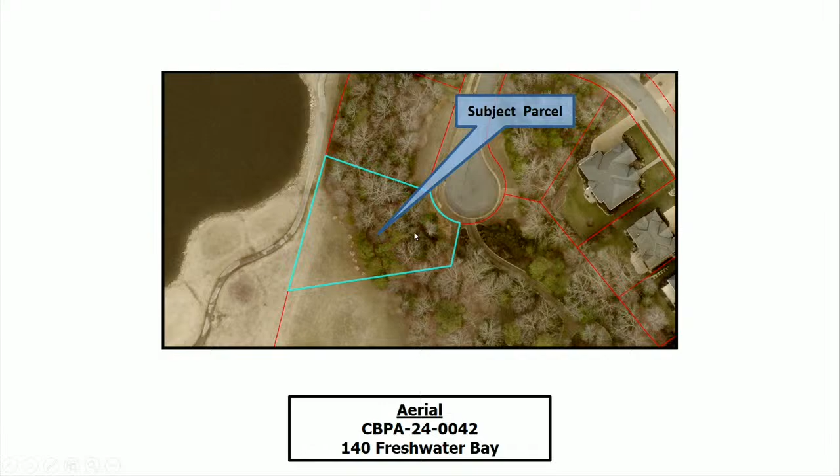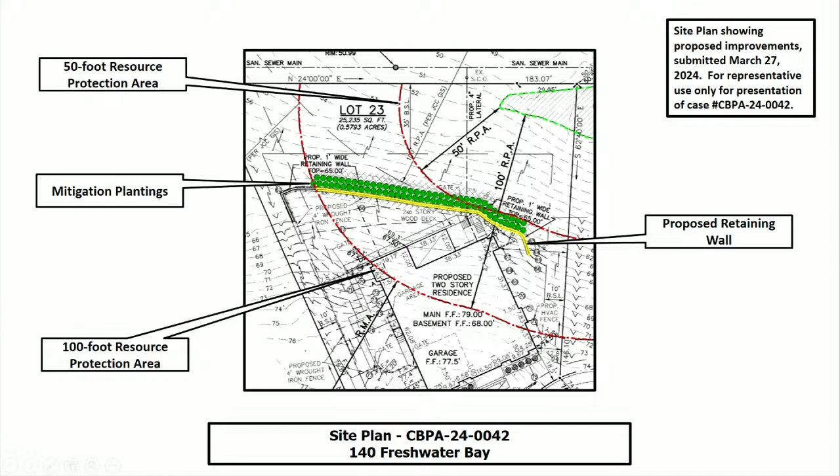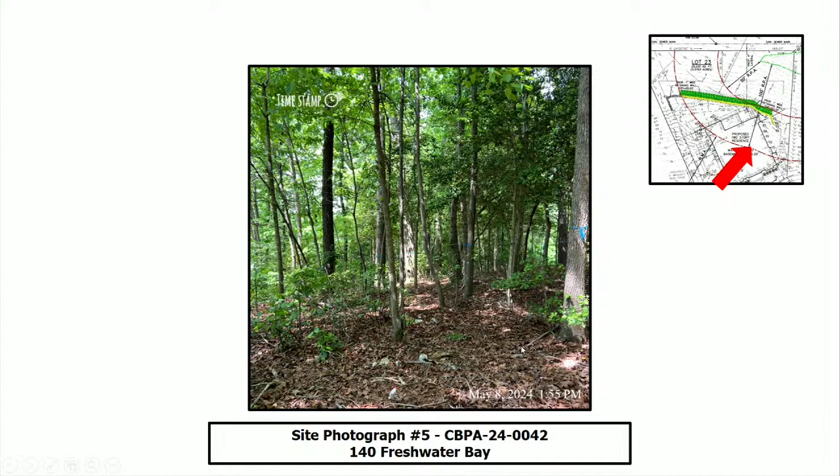Here's an aerial shot of the lot in question, along with the topography and the RPA buffer. And here's a site plan showing where the RPA wetlands are located, with yellow highlighting the portion of the retaining wall encroaching into that landward 50-foot RPA buffer, and green dots indicating the 72 shrubs of mitigation plantings, which you can see better if we move in closer. Again, everything in yellow will be encroaching into the 50-foot landward buffer. Here's the current site conditions, showing the start of the retaining wall to the right, and you can see the slope of the property as we move through these pictures. Moving further left, you can see where the water is, and where the beginning of that retaining wall is further to the right.

Staff has evaluated the application and exception request for the construction of a retaining wall. This application meets the ordinance conditions in sections 23-11 and 23-14 and should be heard by the board because the construction of a retaining wall is considered accessory in nature.

The board may grant exceptions to Section 23-7 if the application meets the following 5 conditions: the exception request is the minimum necessary to afford relief; granting the exception will not confer upon the applicants any special privileges denied by Chapter 23 to other property owners similarly situated in the vicinity; the exception request will be in harmony with the purpose and intent of Chapter 23 and is not of substantial detriment to water quality; and the exception request is not based on conditions or circumstances that are self-created or self-imposed.

Reasonable and appropriate conditions are imposed, which will prevent the exception request from causing a degradation of water quality. Staff has reviewed the application and determined the impacts associated with the proposed development to be minor. Staff recommends approval.

If the board wishes to approve the request, staff recommends the following conditions: the applicants must obtain all other necessary federal, state, and local permits as required for the project. The applicants must submit a surety of $4,500 in a form acceptable to the James City County Attorney's Office to guarantee the mitigation plan equaling 72 shrubs. This exception request approval will become null and void if construction has not begun by May 8th, 2025, and written requests for an extension must be submitted to the Stormwater and Resource Protection Division no later than March 27th, 2025, which is six weeks prior to the expiration date.

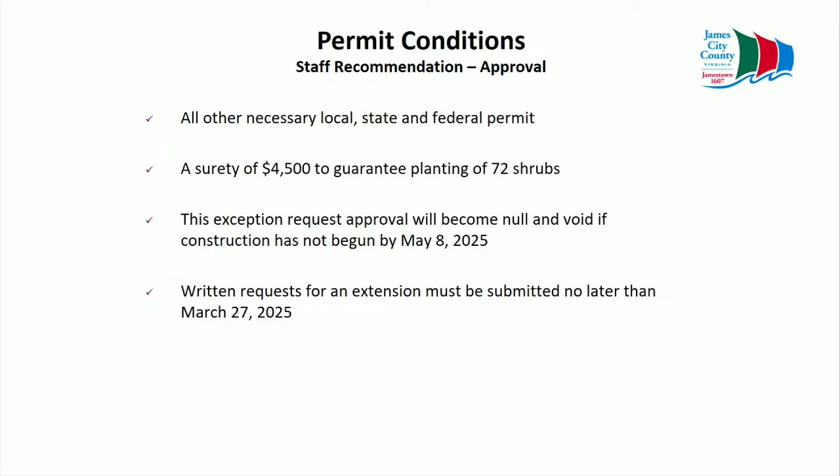If you have any questions, I'd be happy to take them at this time. Any questions for Emily?

In the images there are large pine trees with blue ribbons. Were those trees going to be removed, or is that just showing the path of the retaining wall? There are some trees indicated on that site plan that are to be protected, but I can't speak exactly to which ones, so I'll defer that to the applicant.

Any other questions? Thank you very much. With that, I'll open the public hearing. Would the applicant or their agent care to address the board?

Good evening. How's everyone doing? I'm James Kim, owner of 140 Freshwater Bay. I woke up this morning in Fort Worth, Texas, and I'm now here in Williamsburg, Virginia. Welcome.

I'm not sure what you'd like me to talk about, except that this is in the Eagles Cliff section of Ford's Colony, and I'm limited by the size of the house I could build. I intentionally built this house on the survey so that it was outside of the original RPA, staying outside of the seaward 50-foot RPA. You can see the slope at the edge of the house onto the golf course.

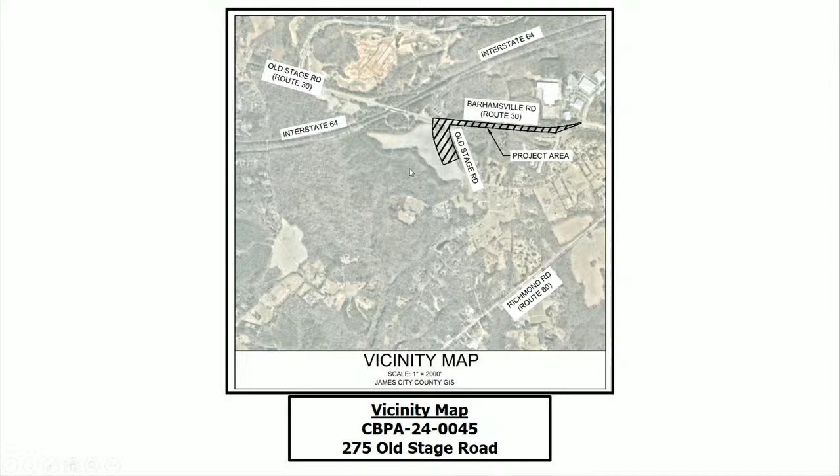As a secondary view, here in blue is 275 Old Stage Road, with those off-site utilities coming down Barhamsville down here. And again, the Diascund Creek watershed shown there in yellow.

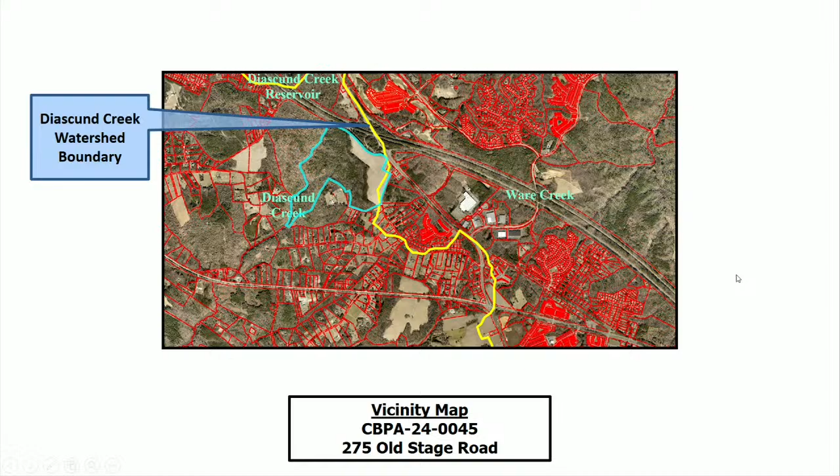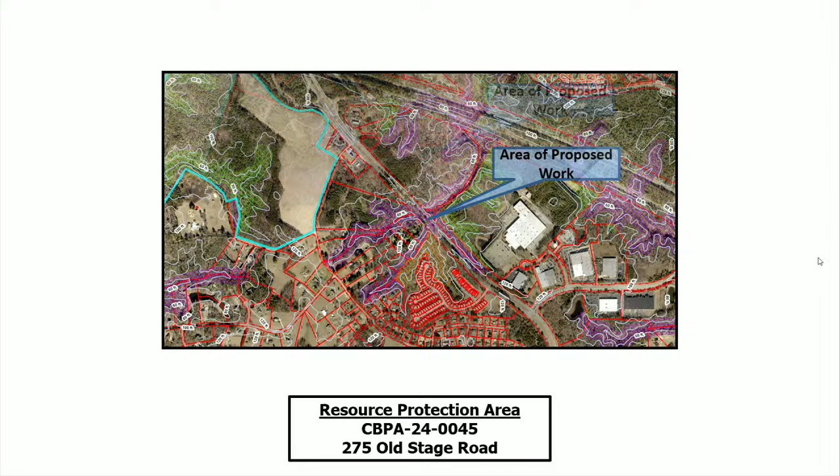Here is more aerial photography, specifically of that area of proposed work, the topography in this general area, and the resource protection area in the entirety of this area, but zoomed in more specifically at the area of proposed work and area of impact.

The applicant is proposing to extend and install public water and sanitary force main utilities to serve the proposed development of the Lovett 64 Commerce Center. The impacts are proposed within the right-of-way of Barhamsville Road and within the existing shoulder section of the road.

The installation of the sewer force main extension will equal 7,996 square feet, and the installation of the water main will equal 4,996 square feet of impacts, for a total of 12,992 square feet of impacts to the RPA. As all these impacts are within the right-of-way, no mitigation is required for this proposal.

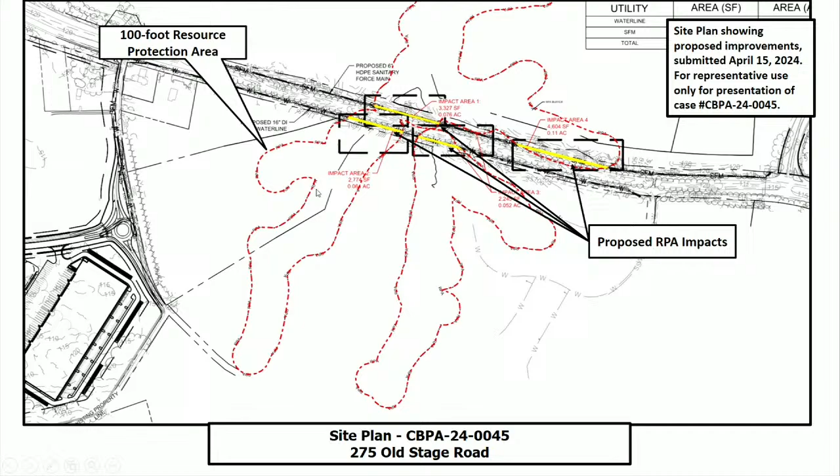On the screen is the overall site plan with the 100-foot resource protection area shown in red, and then all areas of impact shown here in yellow.

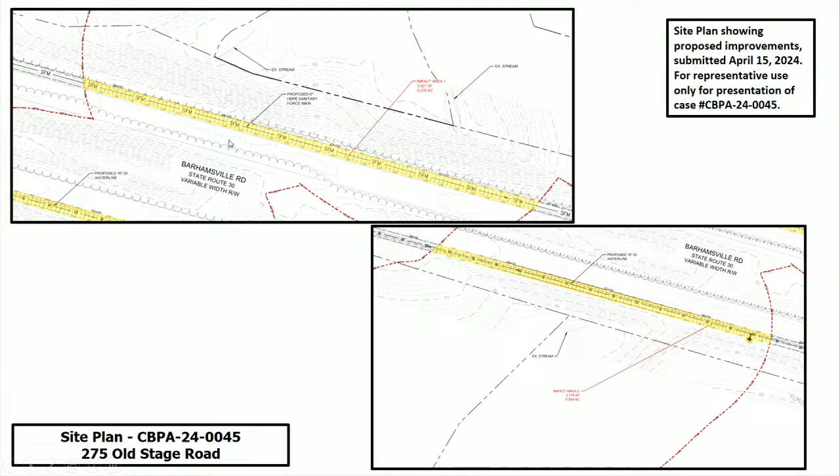Zooming in a little closer on two of those impact areas: above, this is for the sanitary sewer force main, below is for the water line. And flip-flopping a little bit, the top is for the water line again, and the bottom is for the force main.

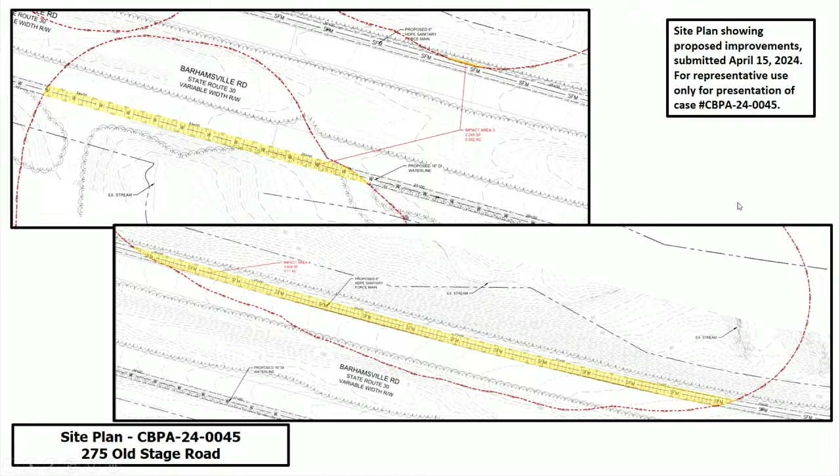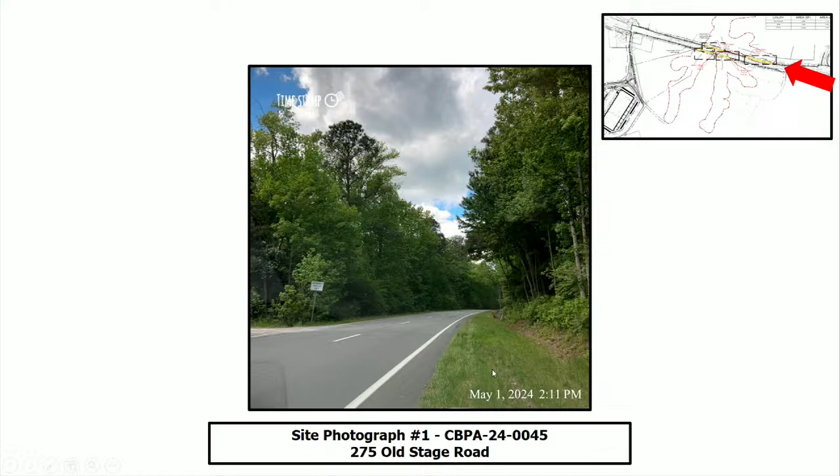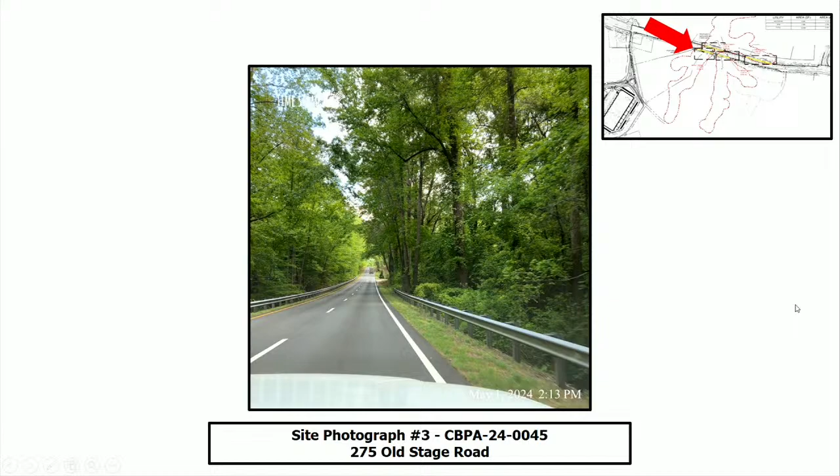Here is photography coming down Barhamsville Road, looking at the portion that will be affected by the sanitary sewer, and moving down the road. And on the other side, the portion that will be affected by the water main, again just moving down the road.

This image was provided by the applicant to show approximately the area of installation for the utilities. As stated earlier, it's within that shoulder area off of the existing road.

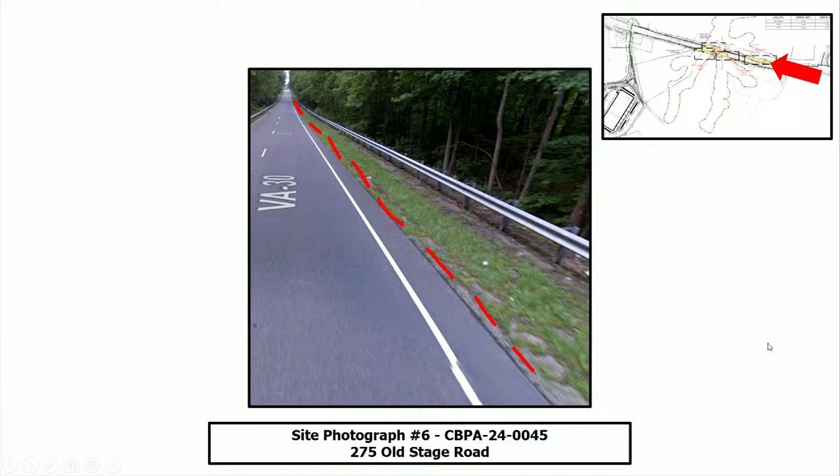Staff has evaluated the application and exception request for the extension of off-site public utilities. This application meets the ordinance conditions in sections 23-11 and 23-14 and should be heard by the board because this project is outside the scope of an administrative approval. The board may grant exceptions to section 23-7 if the application meets the following 5 conditions.

The exception request is the minimum necessary to afford relief. Granting the exception will not confer upon the applicants any special privileges denied to other property owners in the vicinity. The exception request will be in harmony with the purpose and intent of Chapter 23 and is not of substantial detriment to water quality. The exception request is not based on conditions or circumstances that are self-created or self-imposed, and reasonable conditions are imposed which will prevent the exception request from causing a degradation of water quality.

Staff has reviewed the application and determined the impacts associated with this proposal to be minor for the proposed development. Staff recommends approval for this exception request, and if the board wishes to approve this request, staff recommends the following conditions be incorporated into the approval.

The applicant must obtain all other necessary federal, state, and local permits as required for the project. This exception request approval will become null and void if construction has not begun by May 8th, 2026. A written request for an extension must be submitted to the Stormwater and Resource Protection Division no later than March 27th, 2026, which is 6 weeks prior to the expiration date.

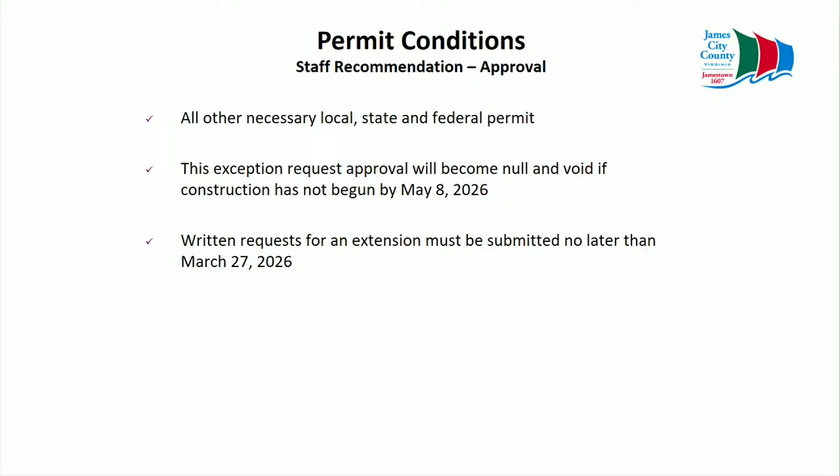If there are any questions, I'd be happy to answer them at this time. Is this work on VDOT right-of-way? Yes, sir.

Any other questions for staff? Thank you, Rob. Thank you. With that, I'll open the public hearing. Would the applicant care to address the board?

Good afternoon. Does that work? Yep, better. Good afternoon, I'm Mark Boyd. I'm with Kimley Horn. We are representing the owner of the property here for the development of the I-64 Commerce Center.

The presentation was very apt and succinct. The proposed utility extensions are coming from LaGrange Parkway down Route 30. That's the closest place that we could connect to existing public water and sewer, running those down Route 30 and then down Old Stage Road to the site.

So we've tried to minimize the total disturbance. Like indicated, the utilities are to be installed within the right-of-way, within VDOT right-of-way, and really within the existing section of the current road. So we're not proposing any additional clearing with these utility installations. As you saw in that red dashed line, it's really kind of right off that paved shoulder currently. No additional clearing. All erosion and stormwater measures will be installed appropriately.

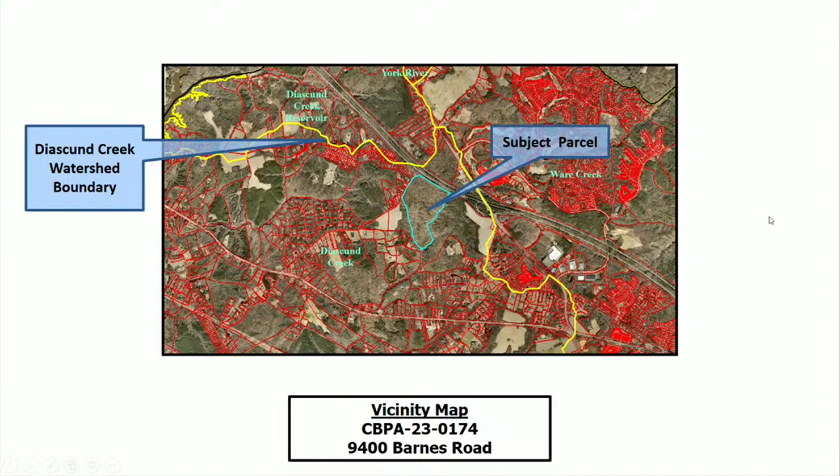A wetlands delineation and RPA study was performed in 2023 and approved by the United States Army Corps of Engineers and the county respectively. The total lot size of this property is 130 acres, of which 26% is located within the RPA. The applicant is proposing to construct a building and retaining wall in association with the Lovett 64 Commerce Center construction.

Impervious cover impacts to the RPA will be caused by the construction of a drive aisle and retaining wall and equal approximately 53,143 square feet of impacts to the RPA. Total impacts to the RPA associated with this proposal equal 121,045 square feet. Construction of this building will also result in permanent impacts to wetlands and stream channels.

Above is the entire site plan for the Lovett 64 Commerce Center. Today we're just looking at Building 1, so zooming in specifically on that area. Above is the proposed building. The resource protection area is shown over here in red, and then those proposed RPA impacts shown in yellow. Again, most of the impact is for the drive aisle, a little bit for the building, and for a retaining wall as well.

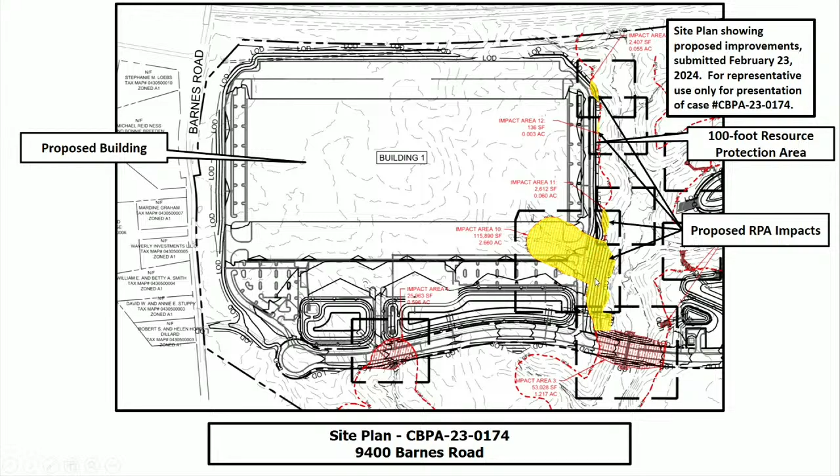Zooming in on those impacts specifically, again, for the drive aisle, the building, and then some of the grading associated with the construction. Again, small impact area here for grading, and on this image on the right, the thicker black line is the proposed retaining wall, and then the subsequent impact associated with that construction.

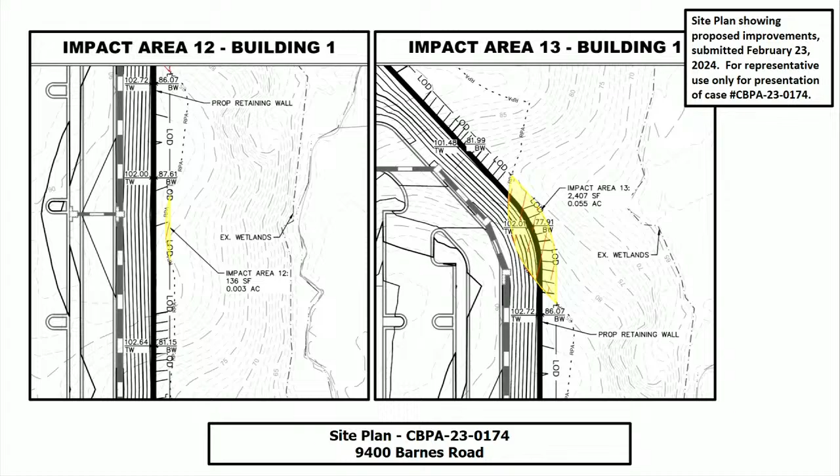Required mitigation for this amount of impervious cover impact is the recordation of a deed of natural open space for an area twice the size of the impacted RPA. In this case, that is 242,090 square feet, or 5.56 acres. This must be outside of all required stormwater forested open space.

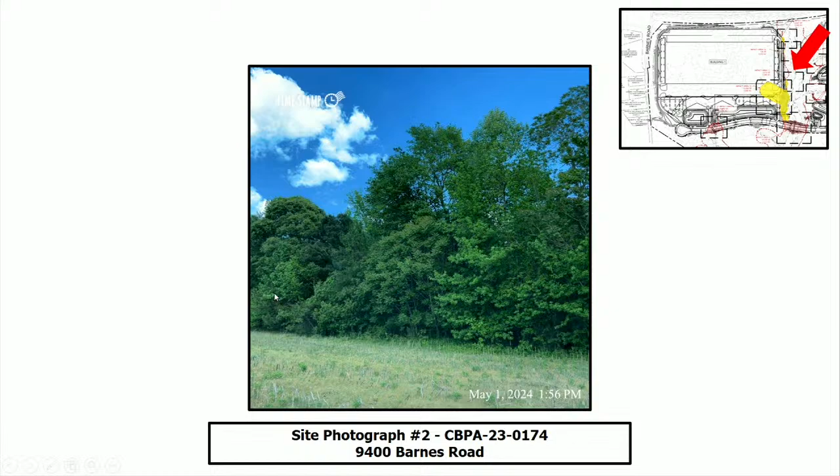Here is site photography looking at a portion of the proposed building. And again, closer down to the RPA impacts associated with this construction. Standing further back, and again, looking at the proposed area for the building and the drive aisle, and more of that general area.

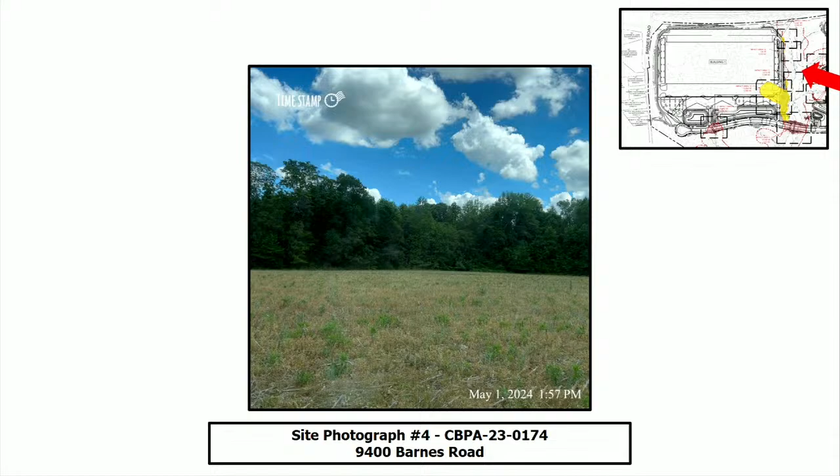Staff has evaluated the application and exception request for the grading associated with the construction of a building and construction of a retaining wall. This application meets the ordinance conditions in sections 23-11 and 23-14 and should be heard by the board because the project is outside the scope of an administrative approval.

The board may grant exceptions to section 23-7 if the application meets the following 5 conditions. The exception request is the minimum necessary to afford relief. Granting the exception will not confer upon the applicant any special privileges denied to other property owners in the vicinity. The exception request will be in harmony with the purpose and intent of Chapter 23 and is not of substantial detriment to water quality. The exception request is not based on conditions or circumstances that are self-created or self-imposed, and reasonable conditions are imposed which will prevent the exception request from causing a degradation of water quality.

Staff has reviewed the application and has determined the impacts associated with this proposal to be major for the proposed development. Should the board find that this exception request meets all 5 conditions outlined above, staff recommends the following conditions be incorporated into the approval.

The applicant must obtain all other necessary federal, state, and local permits as required for the project. The applicant must record a deed of natural open space in the Williamsburg-James City County Courthouse for the additional 5.56 acres of natural open space beyond that which is required to meet stormwater management compliance for the project prior to the issuance of a land disturbing permit.

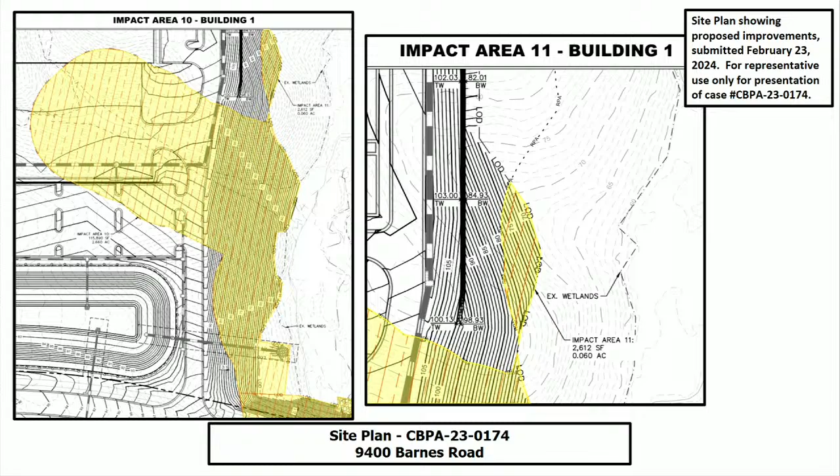I will open the public hearing. Would the applicant care to address the board?

Good evening. Ben Swift with Lovett, 923 15th Street Northwest, Washington, D.C. I also prepared some additional slides, and if it works for you all, I'd like to go through a background on the project to the extent you all aren't super familiar with the rezone that was done, and just work through if that works.

What are the slides just on the back end? Are there additional? Okay, we had some additional slides, but we can share those at a later point. But if we go, can we do the overall site plan? One more. There we go. And just for reference, there's 2 additional buildings in a further phase that will exist down south of the Spine Road there at full build out. But those have not been fully designed and are not in for permit at this time.

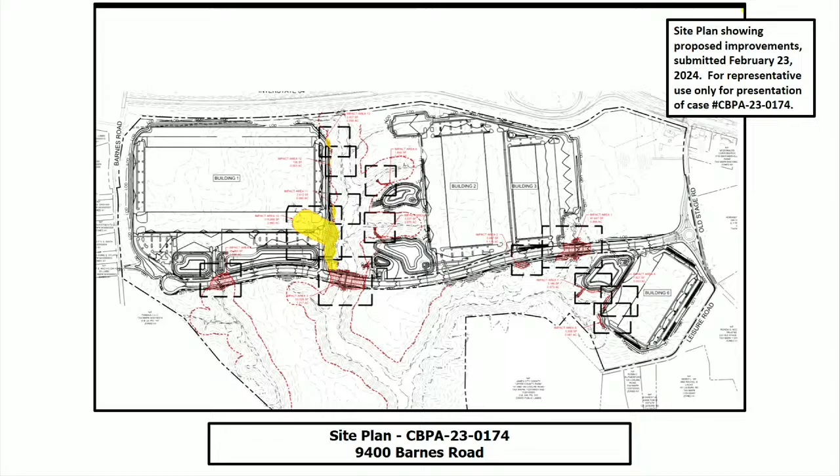In that SUP, it explicitly says industrial can be up to 3.2 million square feet. In terms of our project at full build out, as a result of the RPAs and wetlands on site, it will be roughly 2.2 million, about a 30% reduction in what we're overall approved and allowed to construct per the SUP. As you saw before, as a component of this project, we'll be extending utilities to the site along Barhamsville Road.

In January of this year, we received a Corps and state DEQ permit for all of our associated wetland impacts, which includes this larger portion of wetlands you can see here, and the RPA that branches out as a result of it. At full completion, this wetland would be permanently impacted, so the existing RPA would then solely extend off of this main stream here. That approval was given in January.

As a component of that, we have to demonstrate the need and the fact that we minimized the impacts to the maximum extent possible, and I think we definitely did. If you recall, we were here before the board several months ago for Building 6, and as a result we ended up taking all those impacts away with the implementation of retaining walls.

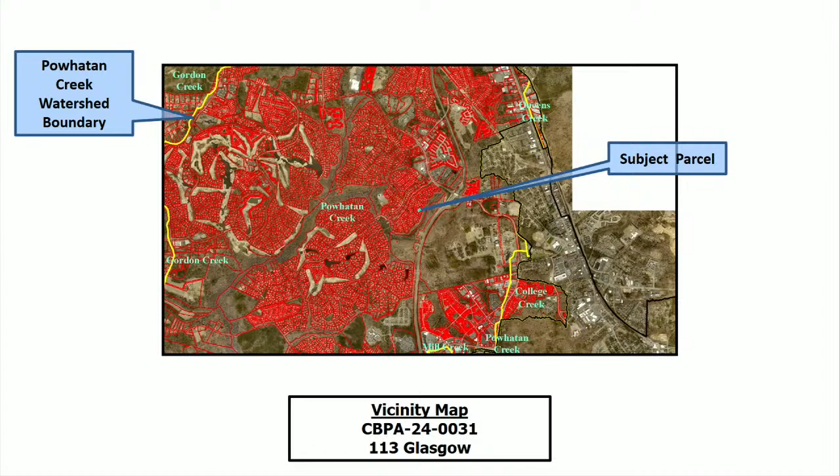On the screen above, you can see the subject parcel outlined in blue and the Powhatan Creek watershed shown in yellow. This parcel was platted in 1988, prior to the adoption of the Chesapeake Bay Preservation Ordinance in 1990.

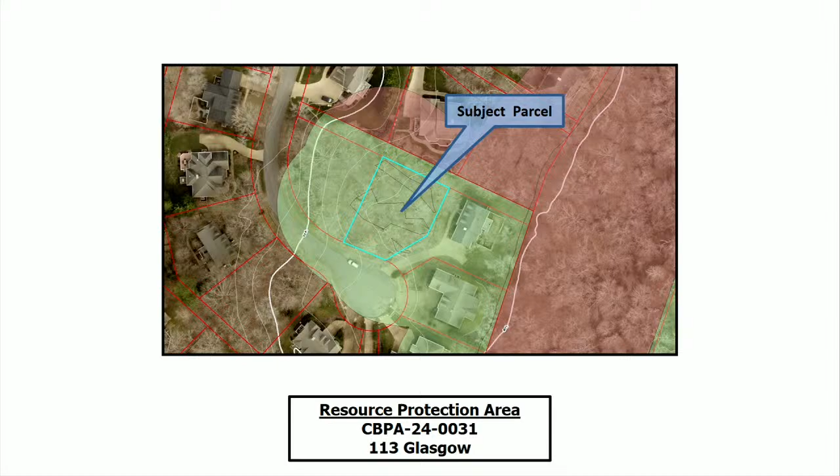The applicants are proposing to construct a single-family dwelling with an attached deck. Case number CBPA-23-0083 was originally heard before this board on October 11th, 2023, where it was denied. This case, CBPA 24-0031, was heard before this board on April 10th, 2024, where the applicants requested a deferral to address drainage concerns from the adjacent property owners.

The original site plan, CBPA 23-0083, included 3,011 square feet of impacts to the seaward 50-foot RPA and 1,678 square feet of permanent wetland impacts. The applicants have since decreased the proposed house size, making the total impacts equal to 1,243 square feet to the seaward 50-foot RPA and 1,471 square feet of permanent wetland impacts, for a total of 2,714 square feet of impervious impacts.

Additionally, the applicants have now included a river rock swale on the left side of the property before the existing concrete swale, 3 French drains that outfall to the proposed river rock swale, and a proposed drainage easement for the existing concrete swale and proposed improvements.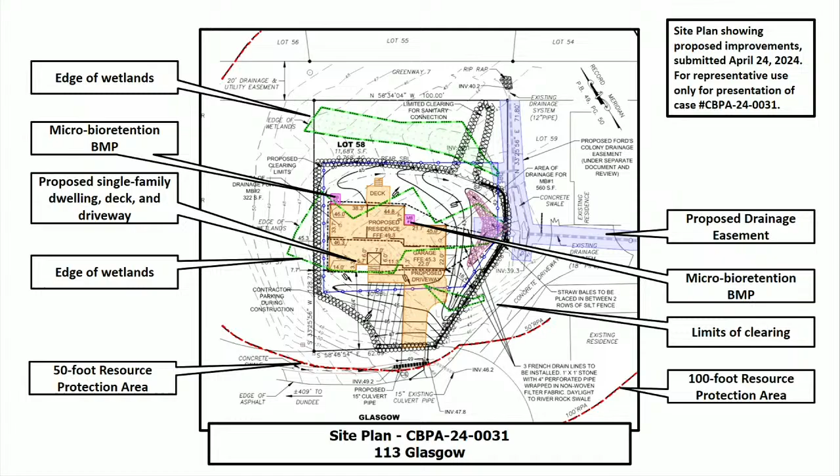Staff is also requesting that an affidavit be recorded in the Williamsburg-James City County Courthouse due to the environmental sensitivity of the lot. Here is their proposed mitigation plan, again equating to 7 planting units with the addition of those 2 microbioretentions and the river rock swale to the existing culvert.

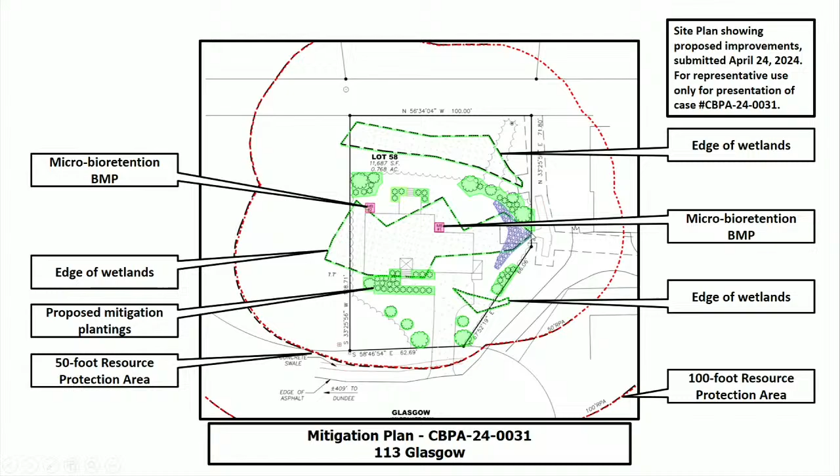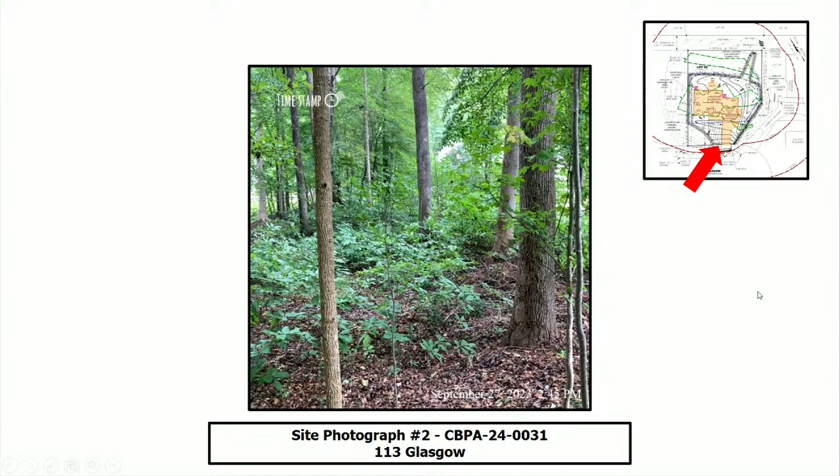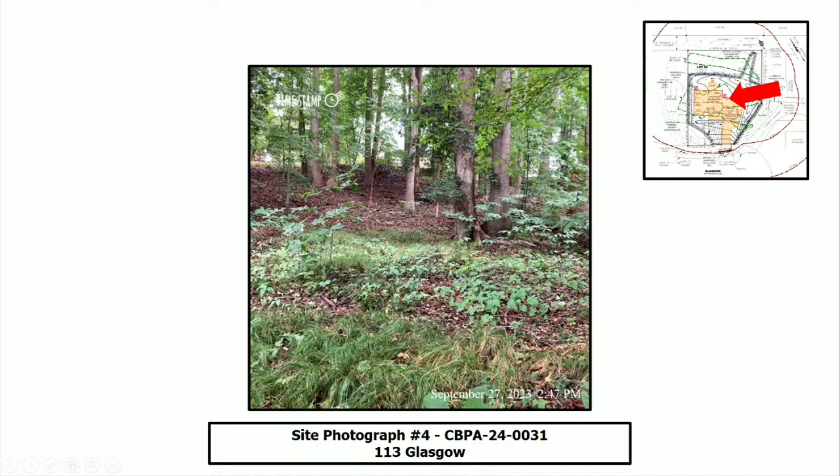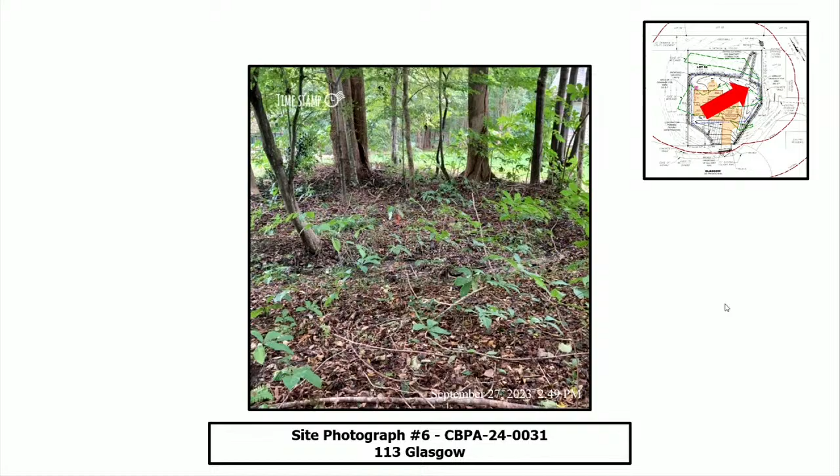Here is photography of the site, taken back in September of 2023 when the first application was submitted. Standing at the street and looking in towards the lot, and looking at that first wetland system. Moving further into the lot, this is looking at the property at 113 Glasgow, a majority of that wetland system that exists in the middle of the property. This is the existing culvert that this property will be draining towards, and the back of the lot. This is looking back towards the cul-de-sac.

These are pictures that were taken at the beginning of April this year, giving you a different view of the property at a different time of year.

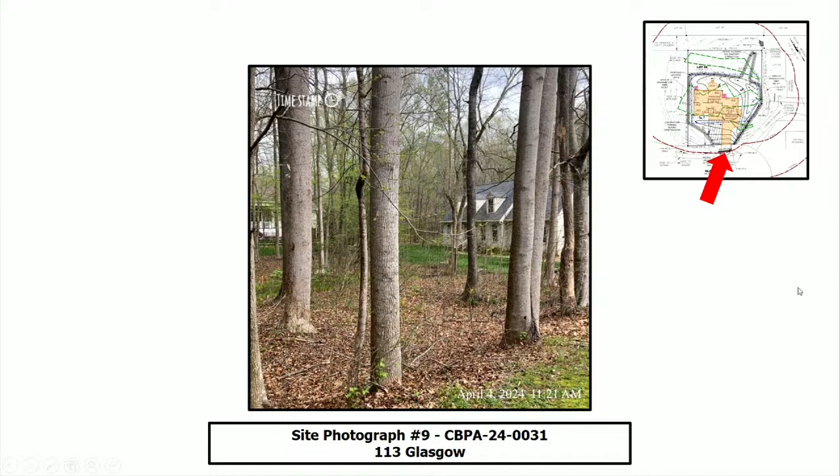Staff has evaluated the application and exception request for the construction of a single-family dwelling with an attached deck. This application meets the ordinance conditions in sections 23-11 and 23-14 and should be heard by the board because the construction of the single-family dwelling is entirely within the seaward 50-foot RPA.

The board may grant exceptions to section 23-7 if the application meets the following 5 conditions: the exception request is the minimum necessary to afford relief; granting the exception will not confer upon the applicants any special privileges denied to other property owners in the vicinity; the exception request will be in harmony with the purpose and intent of Chapter 23 and is not of substantial detriment to water quality; the exception request is not based on conditions or circumstances that are self-created or self-imposed; and reasonable conditions are imposed which will prevent the exception request from causing a degradation of water quality.

Staff has reviewed the application and has determined the impacts associated with this proposal to be major for the proposed development. If the board wishes to approve this request, staff recommends the following conditions be incorporated into the approval.

The applicants must obtain all of their necessary federal, state, and local permits as required for the project. An affidavit must be recorded in the Williamsburg-James City County Courthouse prior to the issuance of a building permit. The applicants must submit a surety of $7,000 in a form acceptable to the James City County Attorney's Office to guarantee the mitigation plan equaling 7 planting units and the construction of 2 microbioretention BMP facilities.

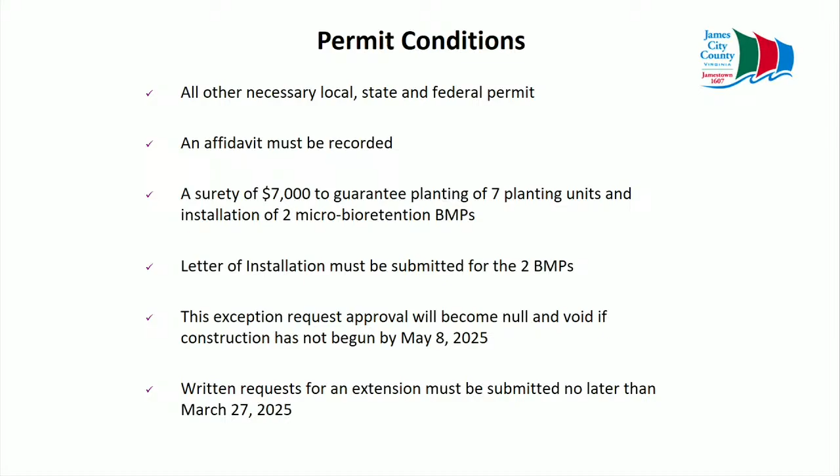If there are any questions, I'd be happy to answer them at this time. Any questions for Robin?

Thank you very much. The public hearing is still open from the previous meeting. So, Mr. Grogg, would you care to address the board?

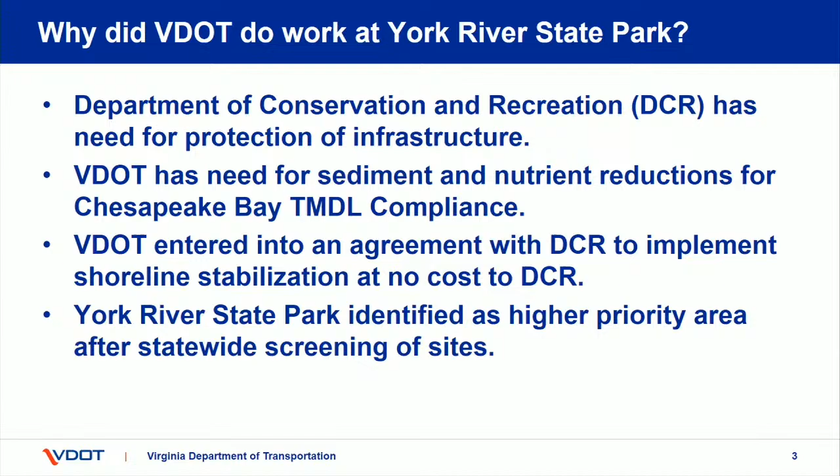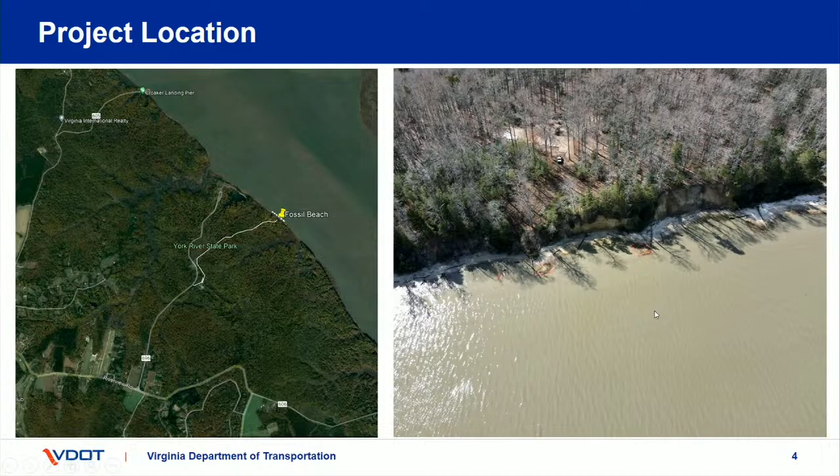So York River State Park was early on identified as a candidate and a high priority area. I'm sure you guys are familiar with Fossil Beach at York River State Park, but here's the general location of where the work was done, before we did our stabilization and living shoreline work.

This is what the bluffs look like. We were losing trees and losing sediment into the river and the Chesapeake Bay at a fairly high rate. I wish I had written it down.

I'm actually going to introduce some other folks too. Back here we've got Daniel Proctor with Stantec and Dylan Constable with EQR. Stantec did the design and EQR did the construction of this project. They're available for questions as well. I just didn't want to make them stand up here while I was running my mouth.

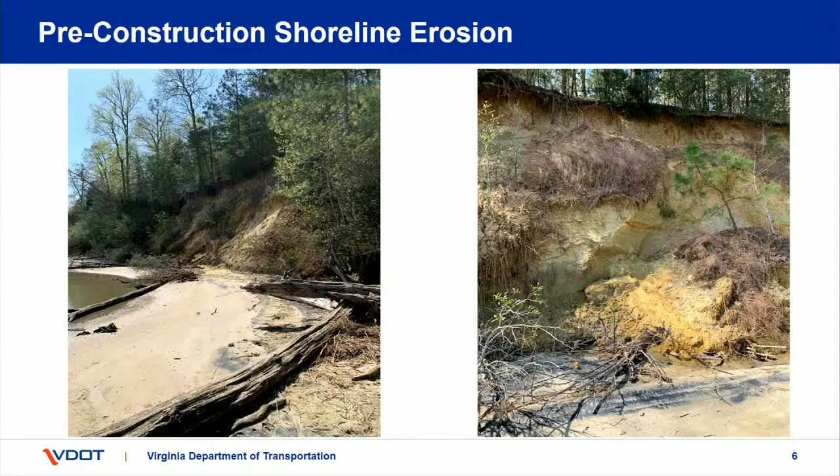So, right, this is what we had. The park had long wanted to do something with the Fossil Beach area, which is the most popular part of the park. So here's some more photos showing the slopes.

So we got the MOA, and then we proposed the project. We designed it, and this is the general design. We did a cut to fill, created a bunch of marsh behind breakwaters, and expanded marsh that was already there.

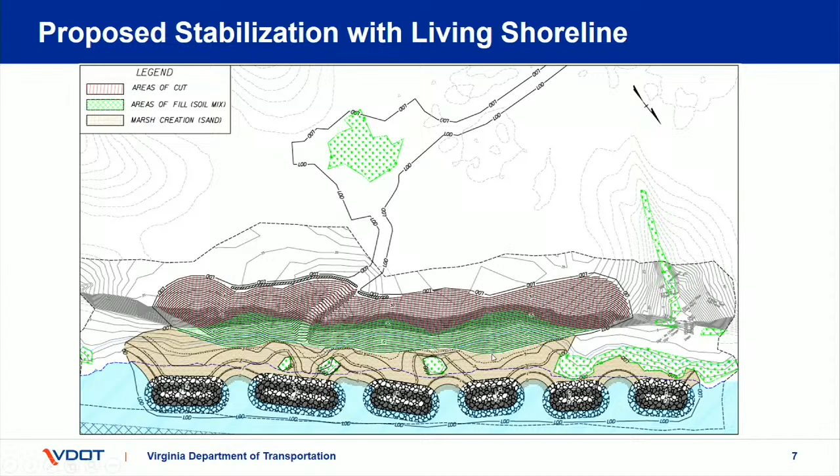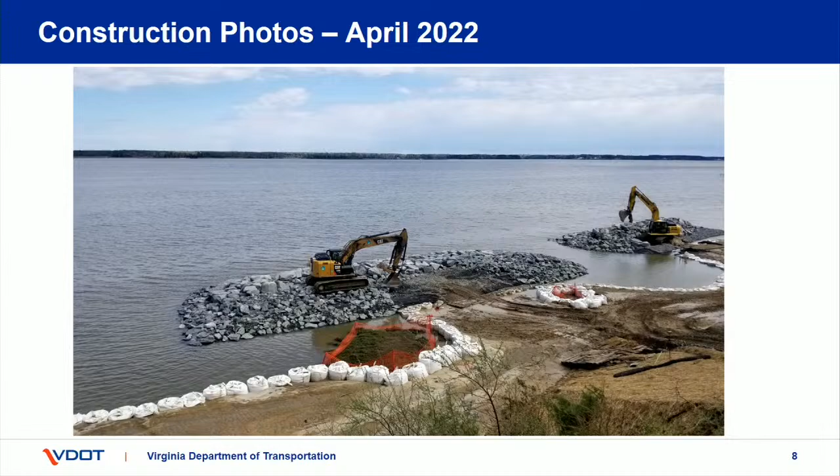Here's some photos of construction. This is two years ago, April, showing breakwaters being constructed with the big yellow machines. We used all these sandbags you can see in this picture to help contain the sediment while we were moving it around. We brought in clean sand to create the tombolos and the widened beach behind the breakwaters.

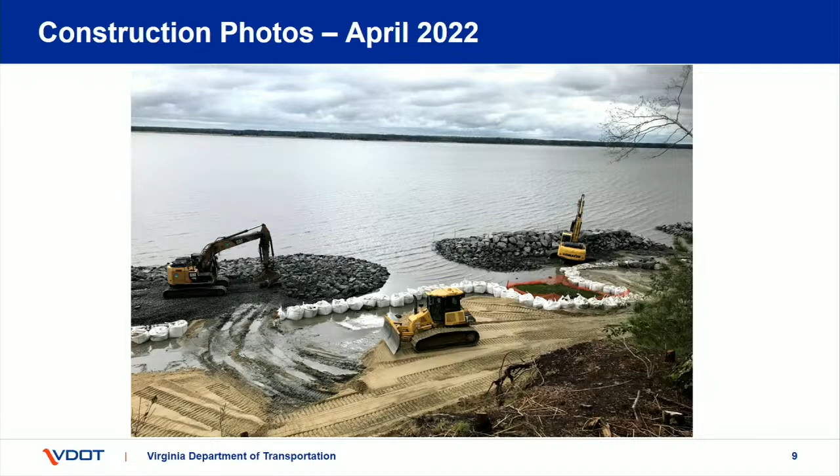We finished up the main original project in the summer of '22, but while we were working, we couldn't help notice another area, about 1,000 feet upstream, that had some pretty serious erosion. On the main trail from the visitor center to Fossil Beach, there's a trail that had been eroding for a long time. They kept moving the trail and were running out of space. They'd gotten to a point where a couple more storms would cause them to lose the trail, and a big wetland behind it was going to be exposed to wave action. The park, Daniel and I actually talked about whether there was any way VDOT could do anything here.

Around the same time, the park manager came to us and asked if there was any way VDOT could do anything here. We were still under construction on the main part of the project, so we did what we could to create a plan to get in there while we still had equipment on site, and do a bioengineering stabilization, to be followed by the York River State Park putting in some sort of wave attenuation.

So we did the temporary stabilization measures in summer of '22. A hurricane came in October and knocked them about. We went back in the next summer, all while still in talks with the park and DCR about how they were going to get grants and what they were going to do. DCR went as far as to purchase a bunch of oyster balls, and they were going to proceed, but things kept fizzling, you know how funding can get with state agencies and local government.

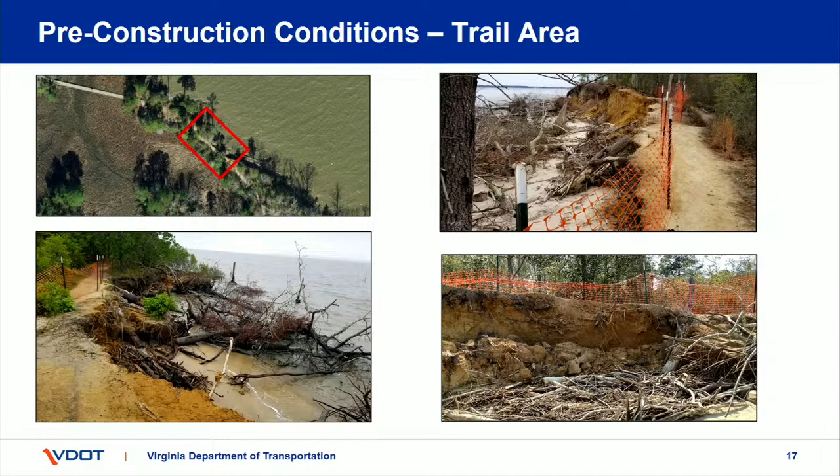The original project was under the time constraint of doing it while we had our equipment there. But when we saw what ended up happening, we came back.

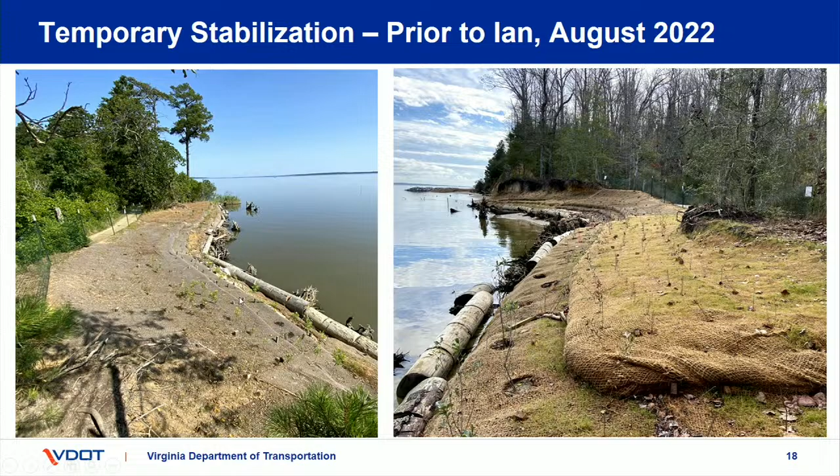So this is our first try. These were lifts of soil and plant material with tree stumps out in front, root wads sticking out, and some toe stabilization here.

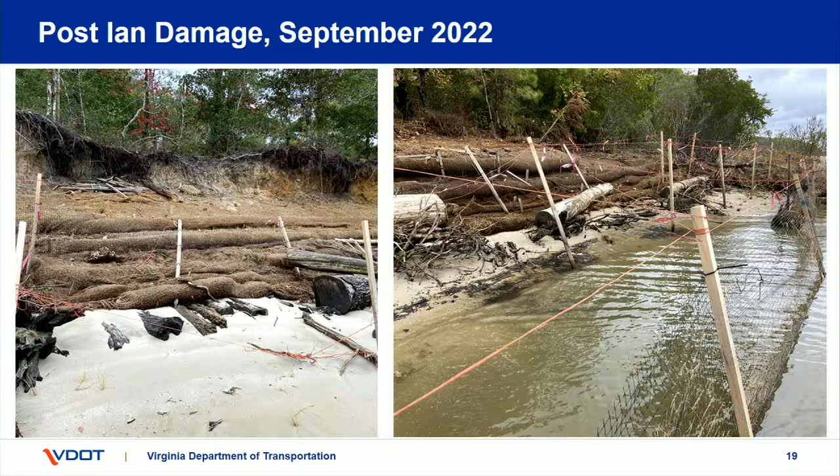So we went back in and fixed it again. The next summer, it blew out again. So our final plan was to come in and do something similar to what we did at the main project.

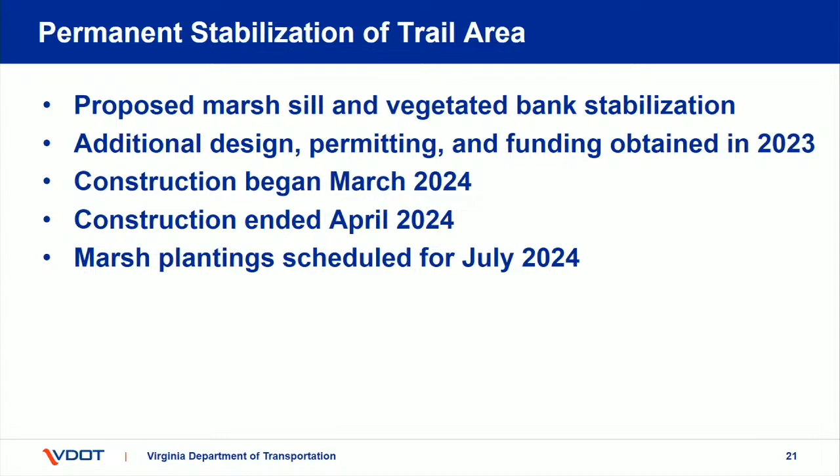Instead of breakwaters, we would put a sill out there. We started in March and finished in April. We're about to do some seeding, and this is what we ended up doing.

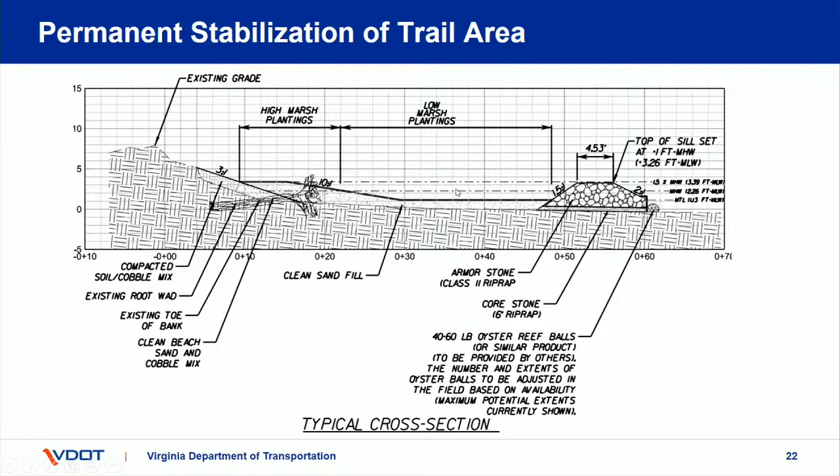Last minute today, I was trying to figure out a way to add a video. I took a video a couple weeks ago showing high tide and the waves crashing against this sill, and it being very still back here. So it's really working well.

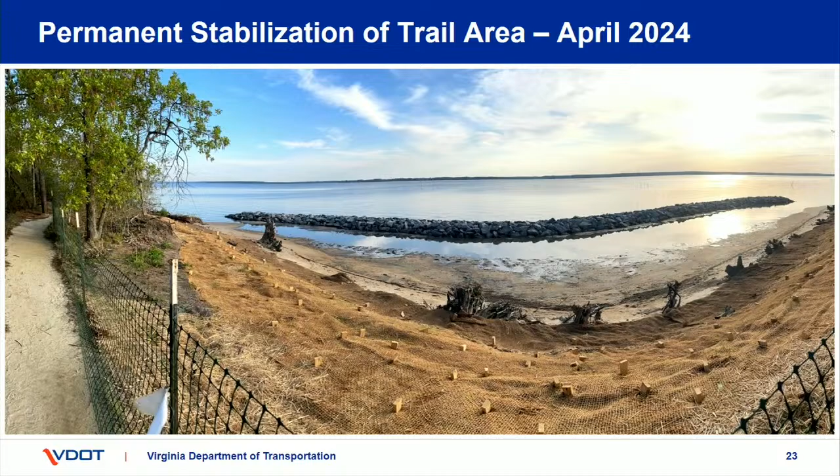Anybody got any questions? Questions?

I'd like to make a comment. I'm on the water quite often, both the York and James Rivers, and in the last few years you look at the quality of water and how muddy it is. Projects like this, I commend you, because large projects like this contribute a lot of mud and contamination to the rivers. I think you all have done a real good job, and I think probably Jim Gunn's operation is the one that's been doing all of this, and he does an excellent job on the James and also the York River.

Well, thank you very much, you're doing a good job. We very much appreciate that. I'll speak for them on that. I get up every morning and I'm grateful for my job because I feel like I'm doing a good job for the agency, for the Commonwealth, and for the environment. So it's pretty great, I appreciate that.

Any other questions? Thank you very much for showing the show and tell. We appreciate it. Get in contact if you want a personal tour.

All right, thank you. Next item on the agenda is CBPA 23-0030, an extension request.